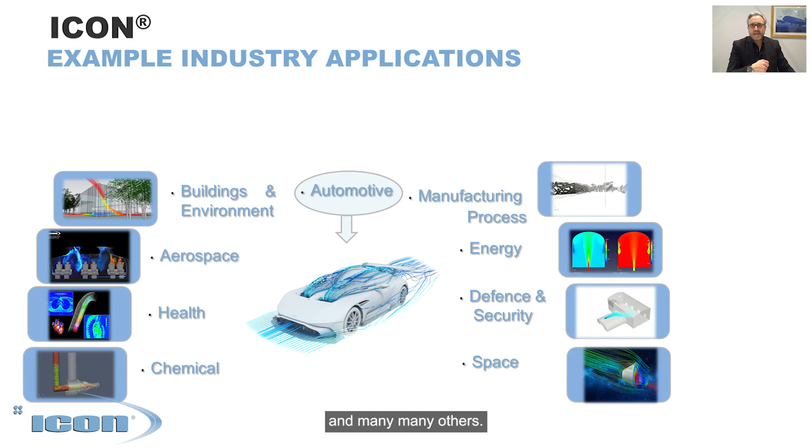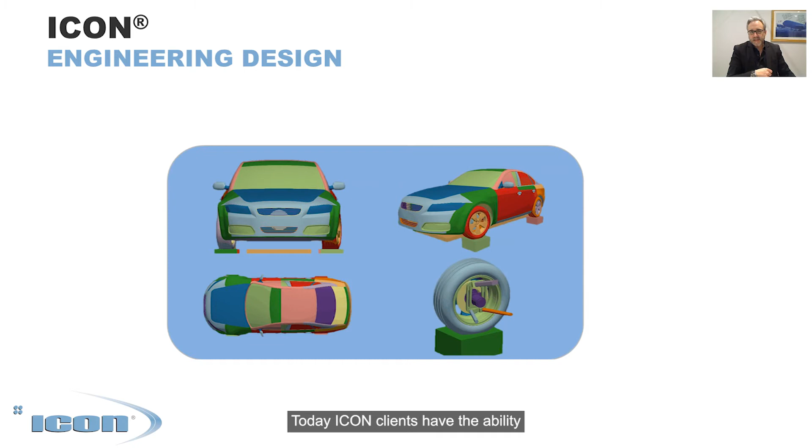Within an industry sector, there are multiple applications that engineers work on, as shown here for the automotive example. Today, ICON clients have the ability to simulate thousands of variations to find the optimal design of their products. This is just one example of the shape and position variations that may be investigated for an automotive vehicle.

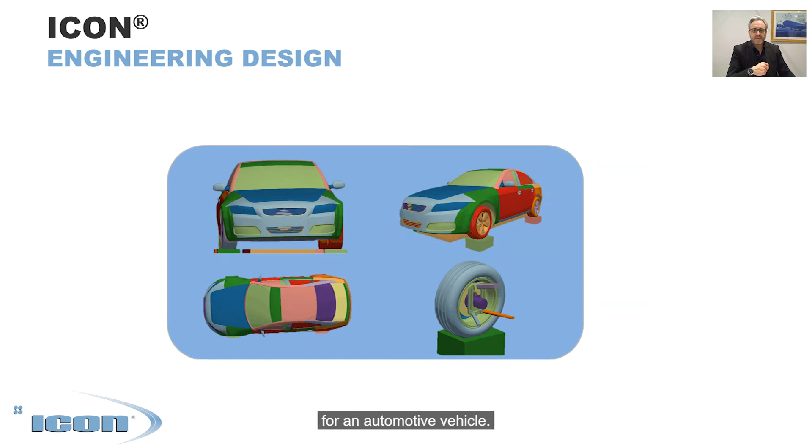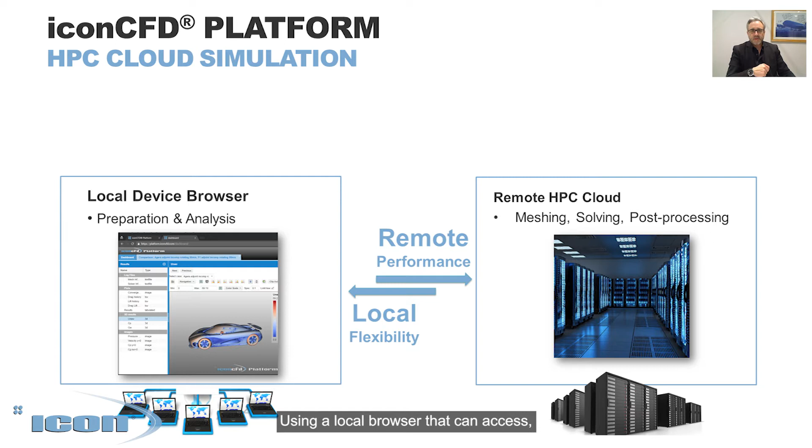Please present your use case and how it works right now. With ICON's cloud-based engineering platform called iconCFD Platform, ICON wanted to offer users access to state-of-the-art simulation technologies and make the setup, running and evaluation of the results of a simulation as simple as possible, using a local browser that can access remote high-performance computing environments.

ICON has already received positive recognition for its work in the field to date. One example includes the commendation by EU Commissioner Oettinger at Europe's largest trade fair, the Hannover Messe, or Hannover Trade Show. And how the use case will benefit from the Morphemic project.

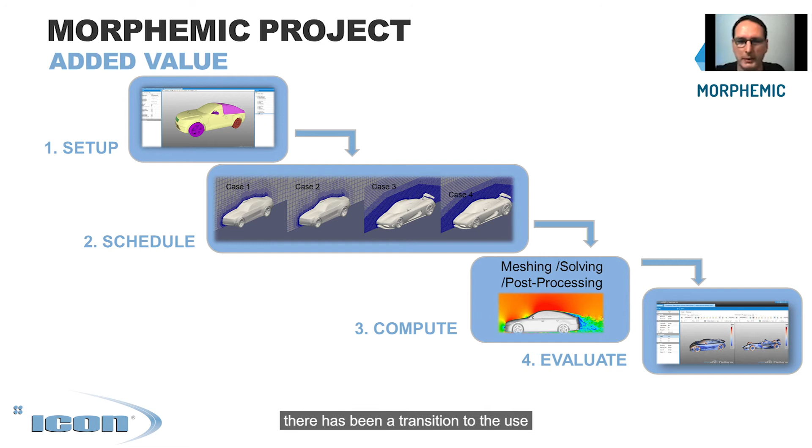Hello Josefina, I'm Sebastian and I'm working for ICON as iconCFD Platform Product Leader. Within the last 10 years, there has been a transition to the use of more widely available public cloud environments on demand. When delivering software as a service solutions such as iconCFD Platform, you can't be tied to a specific hardware solution because of the high variability of the simulation requirements.

For example, you might have to run digital engineering experiments, a DOE, with thousands of short simulations, which only take a few computer cores, and then a smaller number of simulations taking 2 days on thousands of computer cores. Morphemic helps in meeting this challenge of dynamically diverse demand.

Morphemic helps iconCFD Platform to obtain the resources proactively to minimize cost and optimize the cost to simulation time ratio based on end-user constraints, depending on individual service level agreements, SLAs for short, and the number and type of simulations requested. The computing resources are optimized on the fly, dynamically based on the current load and projected simulation loads.

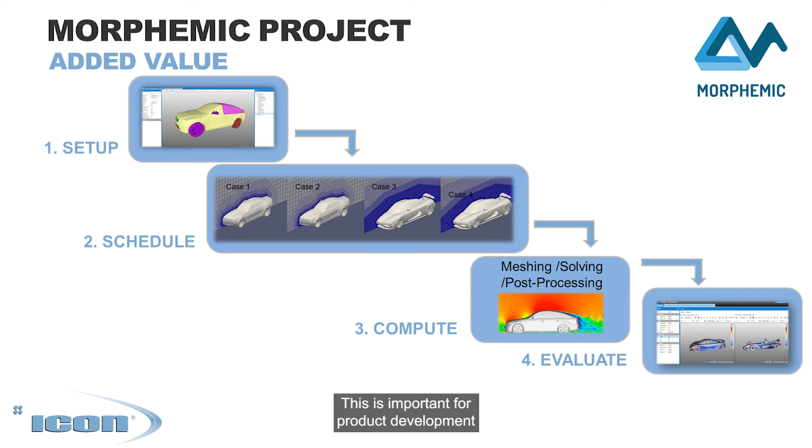The outcomes of the Morphemic project are key to ensuring that, unlike in the past, where the product engineer had to wait for computing resources, they can now define a time to obtain a solution in advance. This is important for product development, in that an engineer or designer can accurately plan and develop. In our engineering simulation use case, the Morphemic server also provides the opportunity to deploy ICON's applications with minimal effort.

The novel multi-cloud approach is applied, and as a result, the engineering software is no longer limited to running on only one cloud infrastructure provider. For example, one day we could use a cloud from Amazon and another day a cloud from Microsoft. In this way, we can draw upon the huge resources from multiple cloud HPC domains. The exploitation of multiple clouds at once enables product developers to avoid waiting for computing resources and engineer their product designs.

In addition to the benefits, the Morphemic framework also offers the flexibility to create packages of ICON software, which clients can run on their own private cloud environments to reduce confidentiality concerns that can occur around data transfers and storage. Over 90% of ICON software products and related services are already based around open technologies. The open source multi-cloud Morphemic platform helps reduce costs and do better product engineering in a faster time.

As a result of all the Morphemic project benefits, ICON intend to take advantage and onboard even more users to our browser-based engineering platform, iconCFD Platform. The next steps for wider use and adoption are to continuously improve the end-user experience through more efficient solvers and more apps.

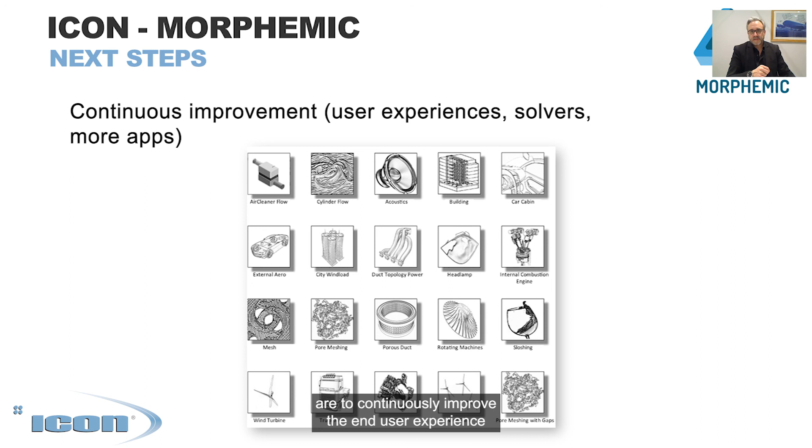So to summarize the project, Morphemic will influence product engineering and development by enabling better dynamic exploitation of multiple cloud environments in public and private modes, faster product engineering in quantifiable timeframes, cheaper digital engineering by optimal utilization of the most cost-effective cloud infrastructures, and finally easier deployment of multiple clouds in both public and private environments.